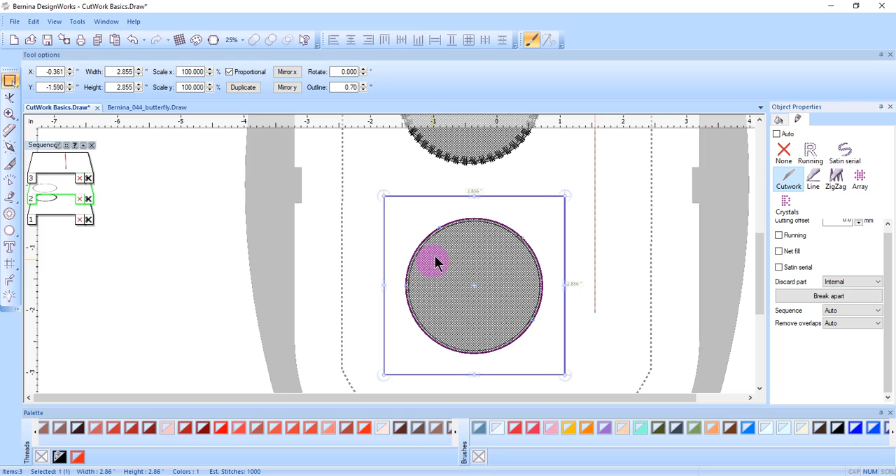Also in object properties, you'll find discard part, and this is a visual that you can apply so that you understand which area is going to be discarded and which part is going to be kept. You have 4 choices, and internal is chosen right now, and that means that the area inside the cut object will be discarded and the area around the object will be kept.

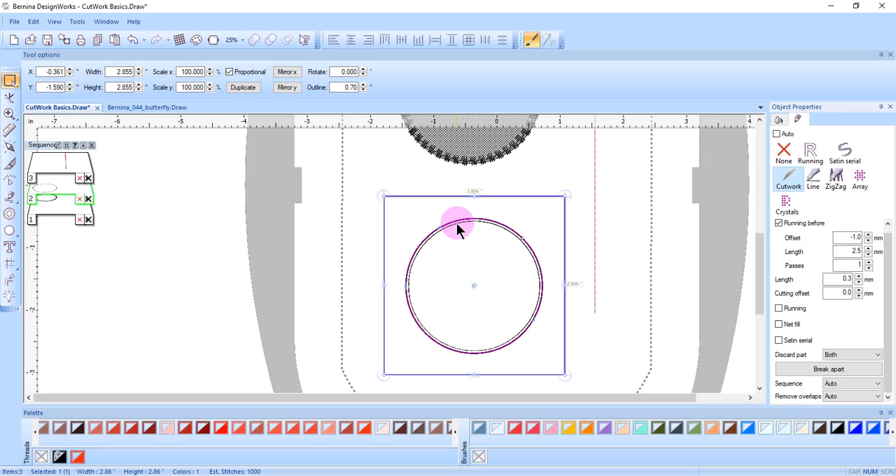External, when you choose that, that means that the fabric outside the cut line will be discarded. You can also choose both, and when you choose both, you don't get the hatch marks in the object, but if you rest your cursor on the object, you can see a tiny pair of scissors that will reference the cut line. Both is used when you apply cutwork embroidery to open shapes or when there is embroidery inside or outside the defined cutwork area.

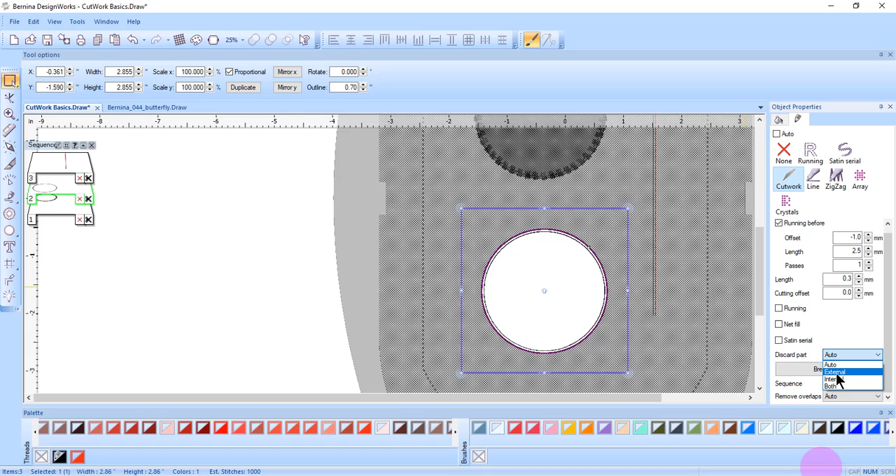With auto, you're telling the software to decide which part of the fabric must be discarded. And you can change this back to whatever makes sense to you. Again, it is just a visual for you to use.

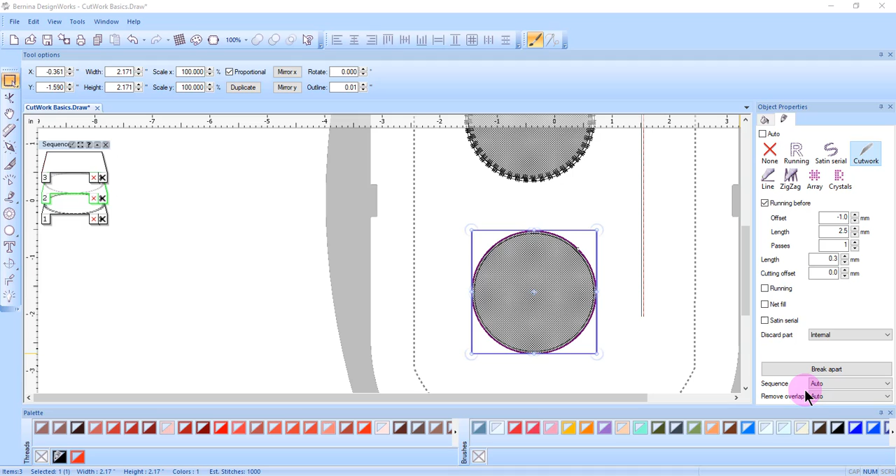Break apart is at the bottom of object properties. Break apart is used when you need to split the cutwork object into its subparts in order to resequence the design. Right now, the cutwork object is combined and includes the running before, the cutwork, and the decorative stitch, and the design will stitch in that sequence.

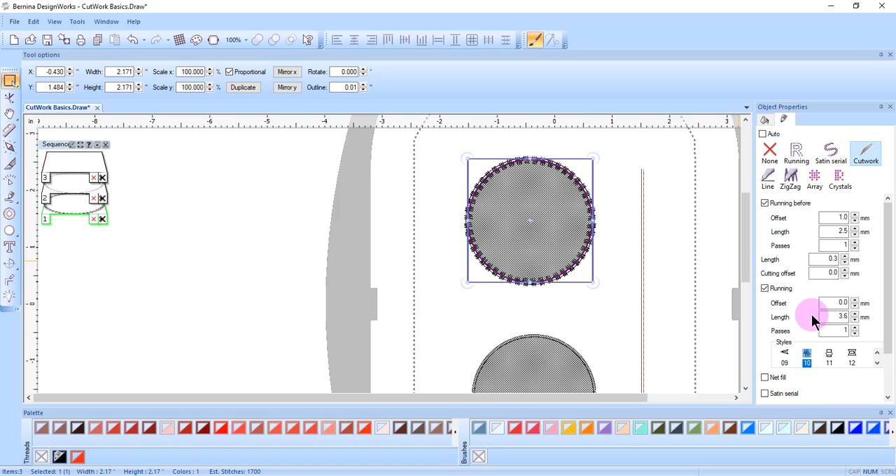But let's say I wanted to create a circle that has a decorative stitch on the cutout circle. That stitch order would not work well if the decorative stitch would stitch after the circle was cut out. First, I'll move the decorative stitch further inside by changing the offset. With the object selected, I can select break apart.

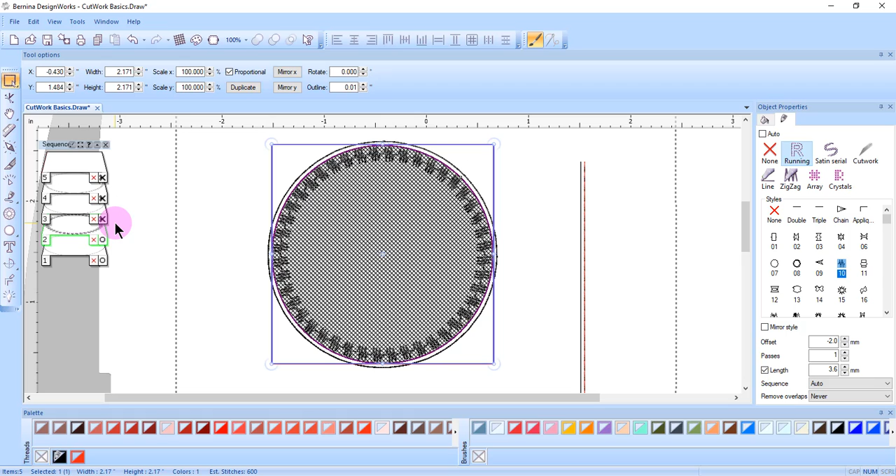That splits the outline separate from the cut. Now I can select the decorative stitch in Sequence Manager and move it to stitch before the circle is cut. This will be a much more successful way to do this design. This option does not work if there is a net fill or applique in the cutwork object.

One other thing that can be applied to cutwork designs that is useful when you have multiple cutwork objects in the same file is combine. And I can select all my cut objects and right-click and select combine. This means that all the cut ones of each of those cutwork objects will be cut before going on to cut 2, cut 3, and cut 4.

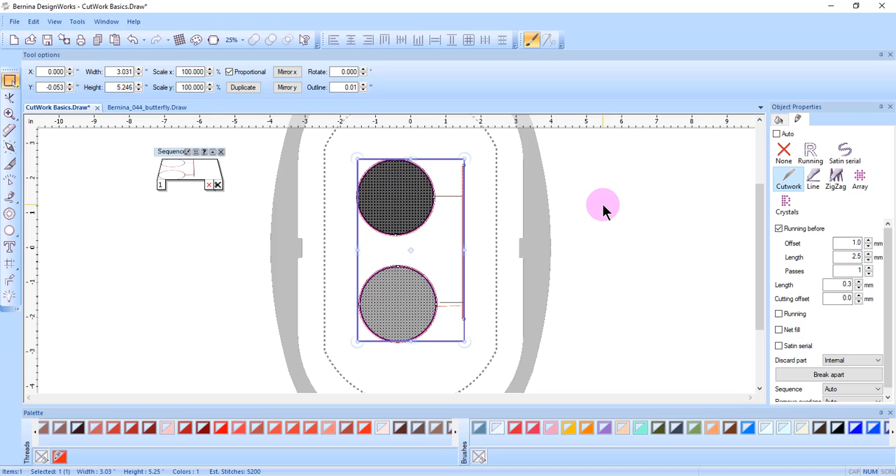The designs that are combined have to have the same properties, and you'll notice that I lost the decorative stitch when I combined the objects. You'll also see with combined objects a jump stitch in between the objects. So designs that are combined make for a much more efficient stitch out, but they also have to have the same properties if you combine them.

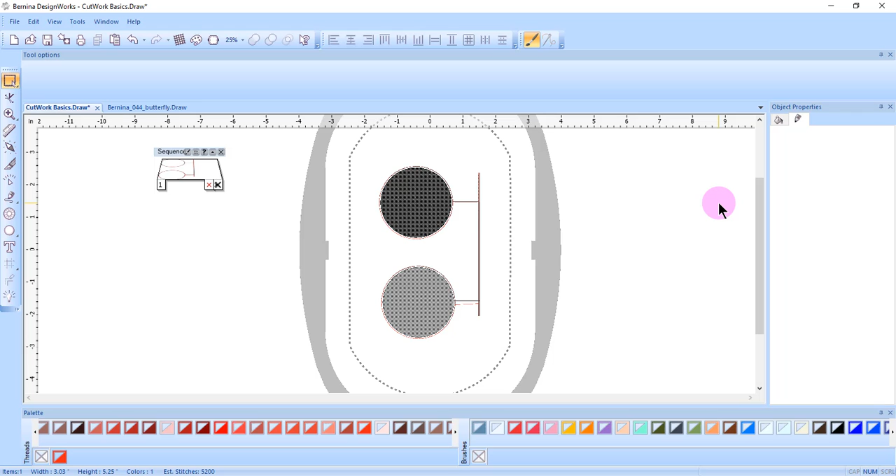If you want different properties, you have to select cutwork objects, right-click, and select break apart. And then you can go back and select that cutwork object and add a running stitch to that object only.